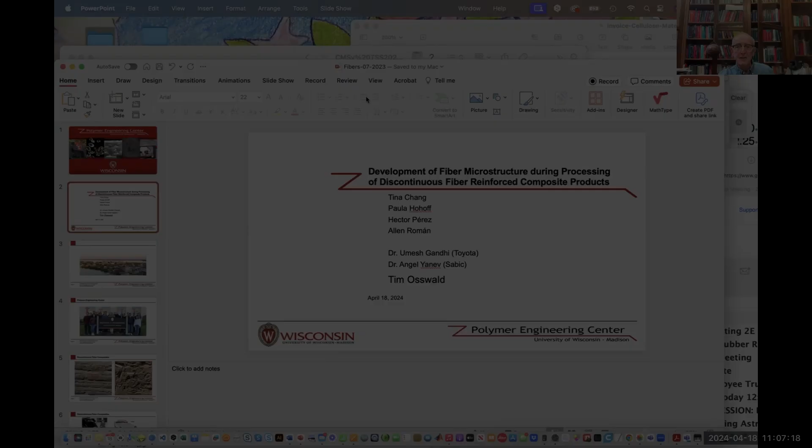Thank you very much. Thank you so much, Byron, for that kind introduction, and thank you so much for inviting me to be part of this prestigious series on composites. My presentation today will deal with development of fiber microstructure during processing of discontinuous fiber reinforced composite products.

There are a lot more people involved in this work that I've collaborated with over the past few years. I've named the 4 most recent graduate students who have worked on this, and I also named 2 of my collaborators in industry, Dr.

Umesh Gandhi and Dr. Angel Yanev from Toyota and SABIC, respectively, and of course there's a lot more people working in this field. But throughout the years, my former advisor, Chuck Tucker, laid the groundwork for a lot of the work that people have worked on now worldwide in this field, and you'll see probably some of his data and results throughout this presentation.

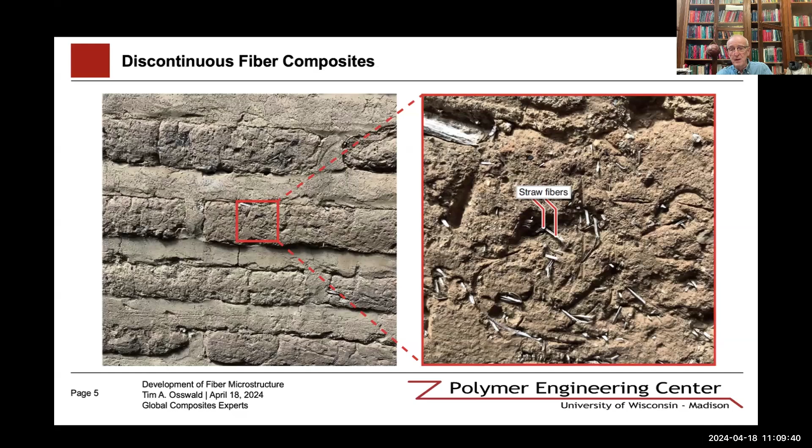Discontinuous fiber composites is not a new thing. This is a photograph I took years ago in Panajachel, Guatemala, where adobe bricks and old constructions are made with mud and straw, which are discontinuous fiber composites, and they are what really hold things together. So it's a field that has been around for many, many years.

You can see some old photographs here: the 1946 trunk lid of a Ford being hit by an axe by Henry Ford, made with unsaturated polyester and glass fiber. Then there was the glass fiber Corvette in 1953 that came out in June of that year. And today, even in 2024, the Corvette is still compression molded out of sheet molding compound discontinuous fiber composites.

During mold filling, many things occur in manufacturing of these products: fiber orientation distributions form, fiber length distributions form, fiber density distributions form, and I will talk about some of those today, some in more detail and some in lesser detail.

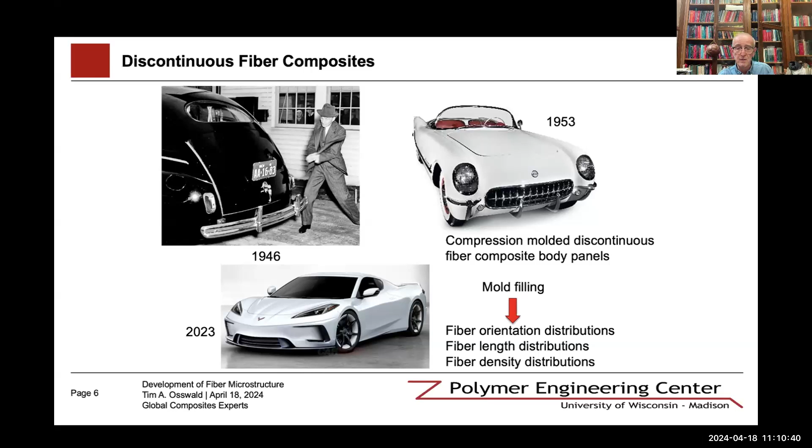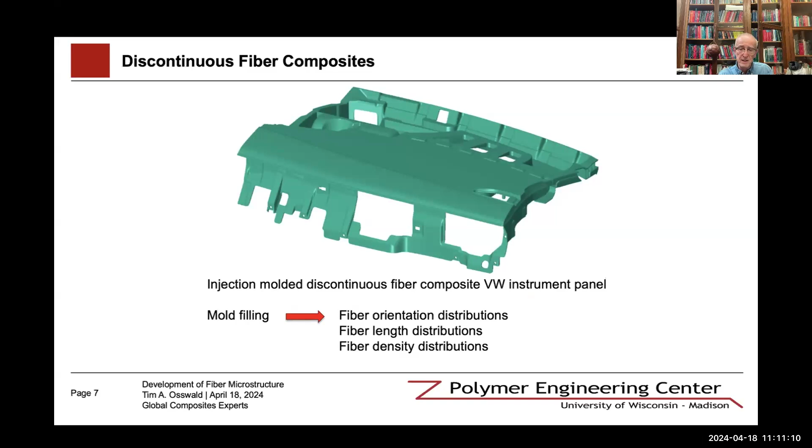In injection molding of discontinuous fiber composites, this would be a demonstrator part from VW, a VW instrument panel. Again, the mold filling is what determines the microstructure within the final part. But as we will see at the end, not just mold filling, but also the injection molding plasticating unit has a big role to play, and I will actually end up with that, which is an area of current research.

From a bird's eye view, I have these graphs. The upper part shows the fiber parameters alone. Fiber length has a huge impact on the properties - you can see the modulus, strength, and impact on the upper left side are all affected by fiber length. Fiber concentration is also important. The impact strength eventually reaches a maximum at a certain fiber concentration, then it becomes more brittle. However, the modulus continues to increase with fiber concentration.

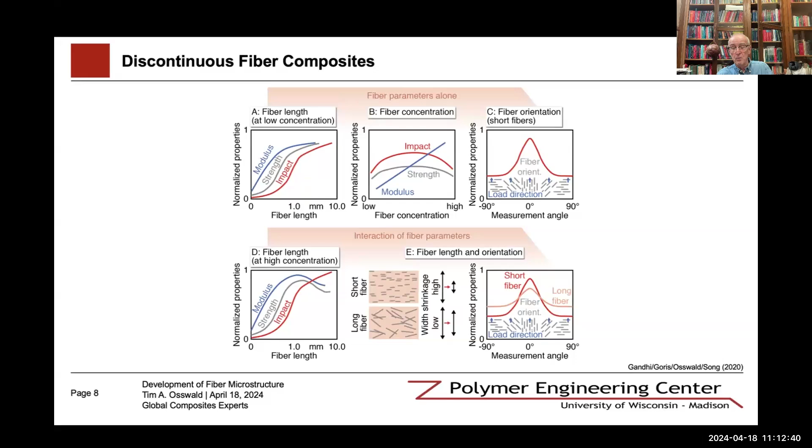Fiber orientation plays a significant role in the final properties of the part. There's interactions between all of these - between fiber density, fiber orientation, and fiber length. At high concentrations, fiber length will start going down, and the modulus eventually goes down. In the middle, you will have shorter fibers and longer fibers, and they will affect orientation. On the right-hand side, long fibers will reach lower degrees of orientation because of higher interactions between the fibers, while short fibers will be able to reach higher degrees of orientation.

This is just a little review for those not familiar with it - a way to represent fiber orientation distributions using the Tucker-Advani tensors. If we look at random orientation, a fiber is represented with a unit vector, as seen on the upper left hand side. If we take the unit vector P1, P2, P3 with the orientation angles, we can generate an orientation tensor where we integrate around the orientation distribution. We can also measure them and average out every fiber, giving us a general orientation tensor, AIJ, which I'll come back to with some results and measurements.

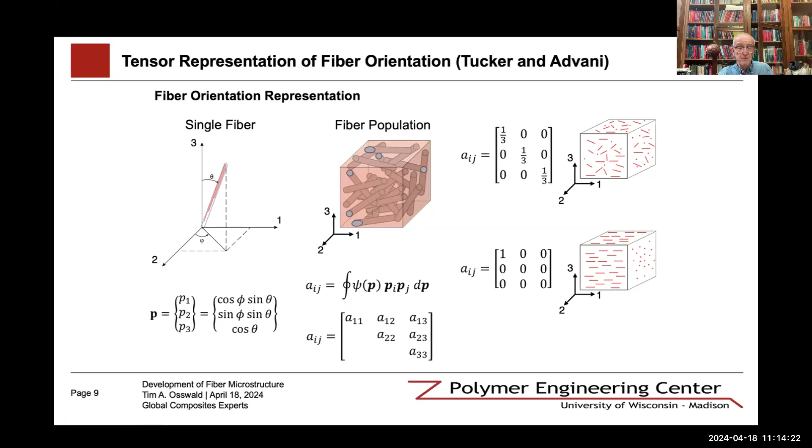If you see the AIJ on top, a random orientation would be represented by A11, A22, A33 as equal parameters that add up to 1. So that's one thing that makes it easy. 1/3, 1/3, 1/3 simply represents a random orientation distribution. If they're all oriented in one direction, as the lower right-hand side shows, then the orientation tensor would simply have a 1 in the A11 term, and the others are 0. So this is just a brief description of the orientation tensors I'll use in the next few slides.

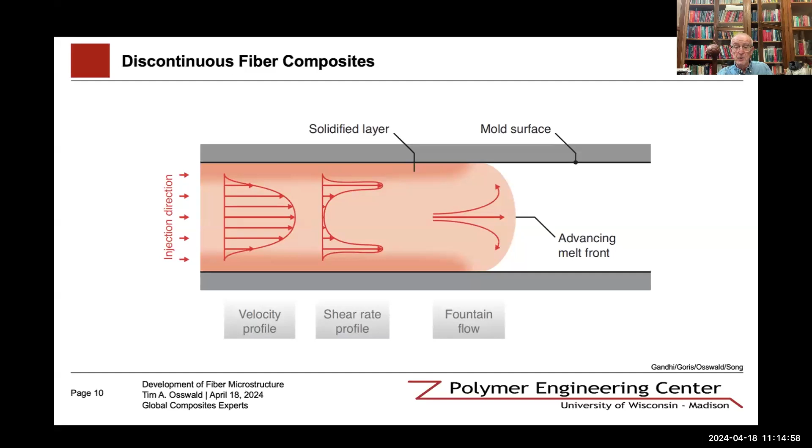There are different things that cause orientation. One of them is the advancing melt front, so you can see a fountain flow effect that leads to orientation, a stretching in that area in the direction of flow, which lays fibers on the upper and lower surface of a molded part in the direction of flow. So it creates a skin layer in the part where you have a preferential orientation in that direction.

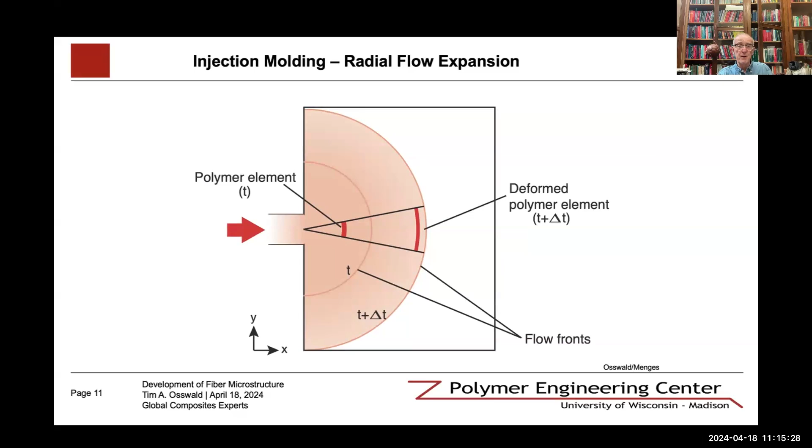There is also radial flow expansion in the central core of the part. So you usually have radial flow expansion, and there the fibers get oriented perpendicular to the direction of flow. So typically you'll have orientation perpendicular to the flow in the central core of an injection molded part, and orientation in the direction of flow in the outer skin.

So let's look at an example part. This is a demonstrator part from SABIC, simulated with Moldex 3D. We have the injection molded process, and we have different areas that we analyzed. You can see the middle figure on the left-hand side, positions 1, 2, and 3 - we will refer to those. The lower part is our pyrolysis examinations.

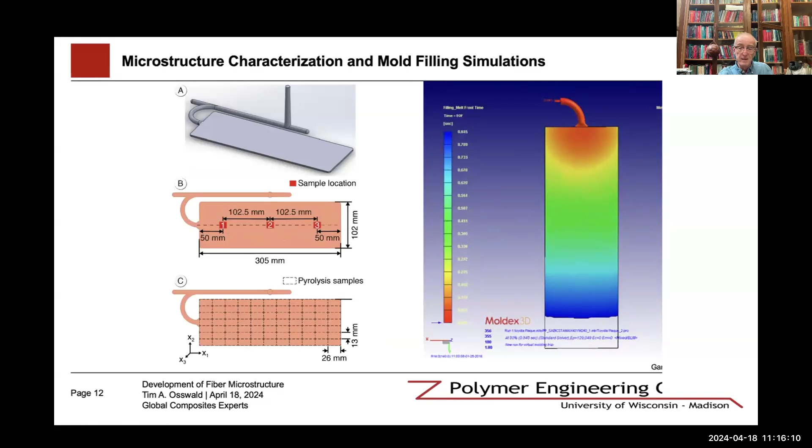We did pyrolysis examinations on the fibers to be able to predict or measure fiber content throughout the part. So if we look at, for example, location 1 in the central location of that plate, we have fiber orientation and fiber density data throughout the part.

This is using polypropylene with 30% glass fibers. The original fiber length of the pellets was 15 millimeters. This is Stamax from SABIC, and you can see an orientation in the direction of flow. The upper picture on the left shows the measured orientation. The lower picture shows the normalized fiber density. And on the right-hand side is a micro CT.

As we go through the thickness of the part, you can see how the orientation starts out in the direction of flow in the outer skin, and then becomes oriented perpendicular to the direction of flow in the central portion.

You can see that in the A11. A11 is the direction of flow. A22 is the direction perpendicular to the flow. So these are the orientation tensors across the thickness.

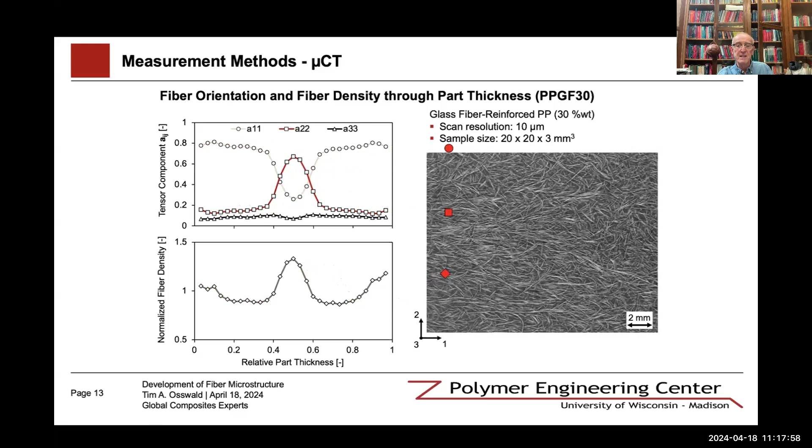So we can see if we travel along the thickness of the part, you can see how the fibers oriented in the direction perpendicular to the flow. You can see the orientation, how it changes, but also how the density of the fiber becomes higher in the center of the part.

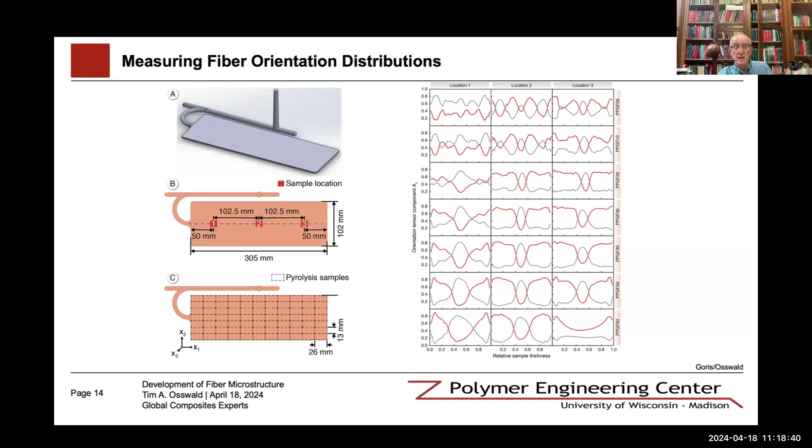So we can do different measurements. Here, positions 1, 2, and 3, locations 1, 2, and 3 in the central graph on the left - there are the measured values, and on the right-hand side with different fiber contents going from 5% fiber content to higher as we go down to higher concentrations. You can see the concentration of the fiber affects the final orientation of the part in the different locations. So these are all measured values.

So many things we did built on the basis laid down by previous researchers. We used what we call a mechanistic model, where we model individual fibers, also called direct fiber simulation. Here we have a simple shear flow where the fibers start out randomly oriented in space. If we move the upper plate and lower plate in opposite directions...

Using a boundary condition between the entrance and exit flow, you can see the fibers starting to orient in the direction of flow. Of course, there is no orientation in the second direction, so only directions 1 and 3 are changed. In the second direction, it remains at 0.33, 0.32. You can see a final orientation in the direction of flow, and fewer orientations across the thickness of the part at 0.03. That would be the lower tensor component.

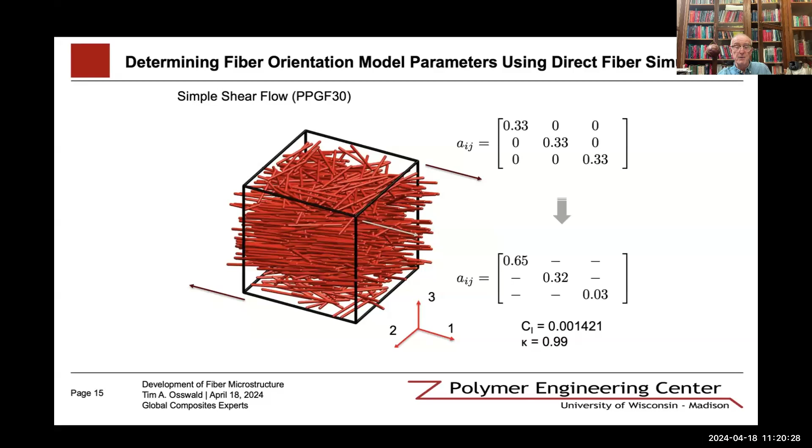For this, we then determined, by doing a fit in the model equation using the Tucker model, the Folgar-Tucker model, where we have the interaction of the fibers as well as the length of it. So we can see in the simulation parameters using Moldex 3D, by applying the mechanistic method to determine the fitting parameters, we can get fairly close representations.

Fiber orientation as simulated and as measured. There's still some discrepancies, but one of the things that the model assumes is a constant fiber density distribution. And as you saw, the fiber density distribution in the center increases, so we have more fibers in the center or core of the part than in the skin area.

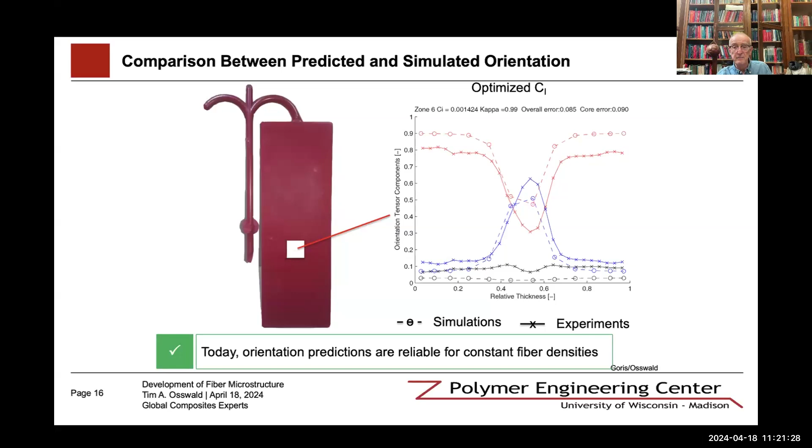And so obviously we will never be able to get a very accurate representation unless we include the variability or fiber density distribution during processing. We can also use this in compression molding. Compression molding is when we simply cut charges, place them in the mold, and then squeeze them. This would, of course, also lead to fiber orientations.

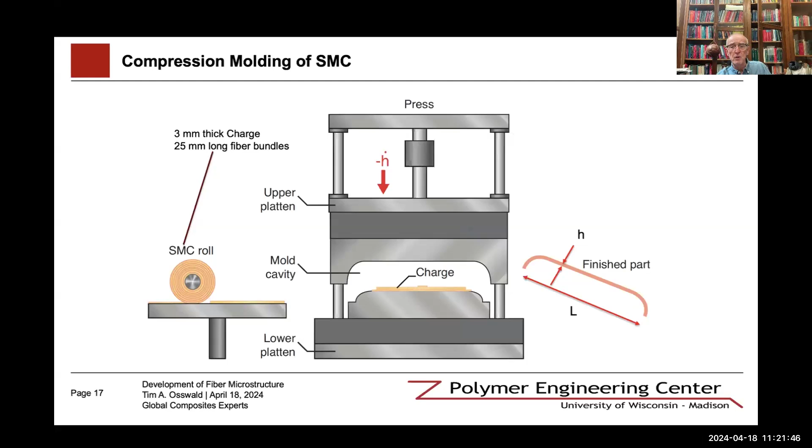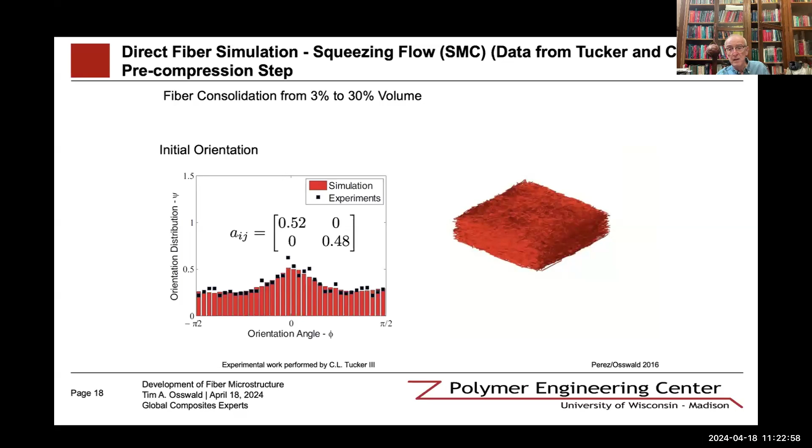And then simply compress them without generating any deformation, so the fibers interact during compression. That's the change you see between the original data and the simulation data, which are the red bars. The black dots are the original data, and the red bars are the orientation in this charge, represented on the right-hand side.

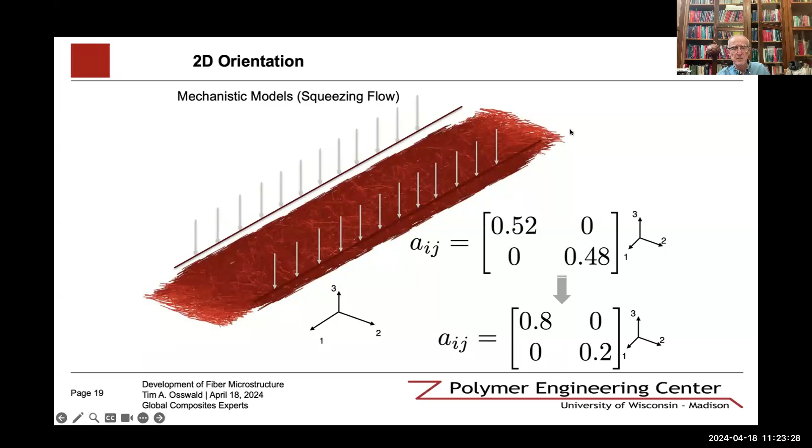And so if we squeeze that in one direction, as in the experiments that Chen and Tucker performed, you can see the change in orientation, represented here with the Advani-Tucker models. There are other things you can see that I'll refer to a little bit later. You can see a change in the fiber density distribution, particularly in the flow front.

So if we compare the Folgar-Tucker model to the experiments by Jackson and Tucker, my mistake, not Chen and Tucker, and the mechanistic model, you can see they all match quite well, which means the mechanistic model can represent the orientation really well. We can use the mechanistic model to determine interaction parameters and fitting parameters for the various models that exist.

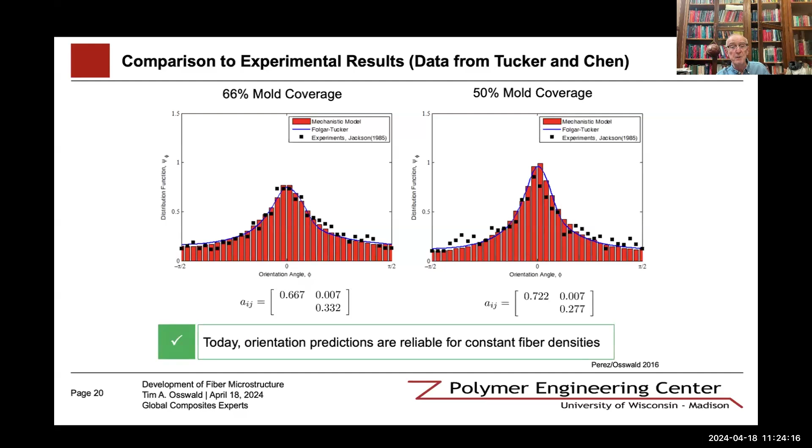So today, orientation predictions are reliable for constant fiber densities, and we know that fiber densities, of course, vary. The reason why is from the Tucker and Chen data, where we can see the need for having orientation in the final properties.

If we just concentrate on the lowest curve and the highest curve, that's in the direction perpendicular to the fibers and parallel to the fiber orientation, for the 33% mold coverage. So when we have a charge that's three times as thick as the final part, there's quite a bit of deformation, which is not atypical for compression molded parts.

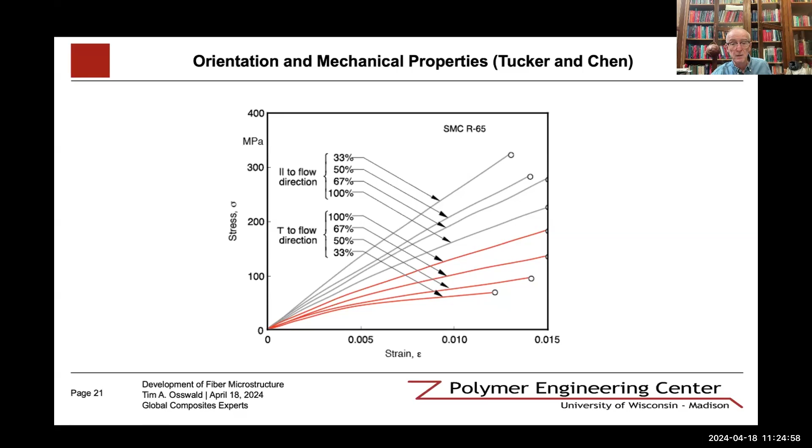If we look at the compression from the top, we can see fiber-matrix separation taking place. The little black box represents the actual volume of the material, and the fibers, you can see them lagging behind. This is very typical for compression molded parts.

So if you look at trunk lids and hoods of compression molded parts, the part that first starts failing is the crumbling at the edges. The edges crumble because they're very poor in fiber content. This fiber-matrix separation is something we need to deal with and needs to be predicted, and it's something not quite well understood yet. There are different models by Morris, Boulay, and others that represent fiber-matrix separation and fiber migration, but they are not quite where they should be.

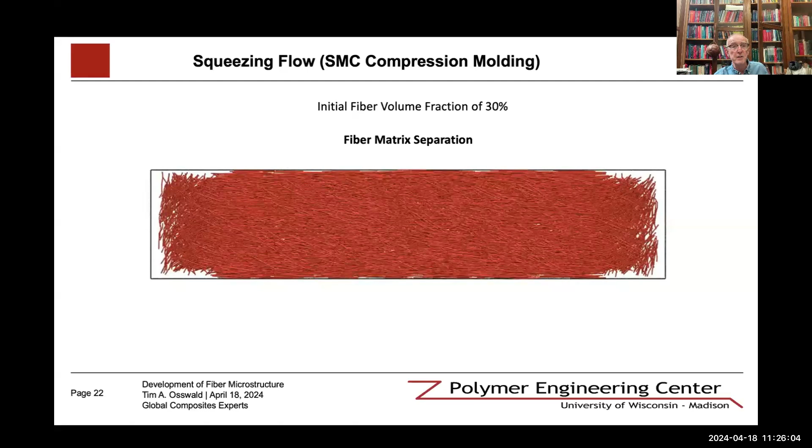Software today does predict fiber matrix separation, but in many cases they don't lead to the actual distributions seen in parts. The first thing I'll show regarding fiber matrix separation is, again, the three samples 1, 2, and 3, for two different fiber contents: 20% glass fiber and 40% glass fiber.

These are glass fiber, injection molded parts using the Stamax materials, where the original fiber length is 15 millimeters. You can see there are two different techniques used to measure the fiber density distribution. The red lines are micro CT, assessing the fiber density distribution using that method.

The second one, the little gray circles, is a more cumbersome way of doing it, but more exact: milling the part, measuring the content, burning the powder that is milled off, and measuring the glass content after a pyrolysis analysis, so it's more accurate. But you can see both techniques, the micro CT and the milling method, actually give the same results.

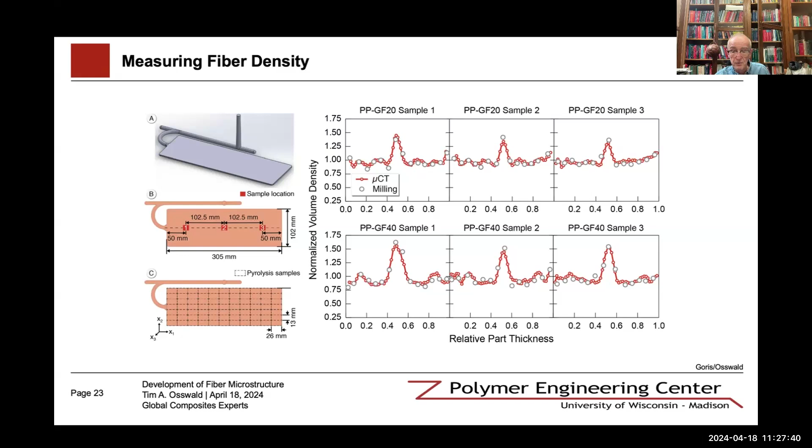So micro CT is definitely a technique that can be used to measure that fiber density distribution, and we've used that in many of our studies, so we don't have to use the cumbersome milling technique.

Another aspect of fiber density distribution is taking samples, not looking at the thickness distribution, but rather taking small samples as shown on the lower left side and doing pyrolysis on that, measuring fiber density distribution. You can see from left to right we go from 5% to 60% glass fiber content.

There are 6 plates, and each plate has 2 halves, a symmetric case, so we actually have the averaging of 12 different samples, and you can see how the fiber density distribution changes with fiber content between 5 and 60%.

There is a significant change in fiber density. You can see the typical filling, fiber content of 20, 30, 40% that is used commercially, that there is a huge fiber density at the end of the part. That's very typical: if you mold a part, the last place to fill usually has the highest fiber density.

This is something people are not able to predict very well yet using models like the Morris and Boulay model, which is the one implemented in Moldex 3D at least. That effect is quite significant, and I think further work needs to be done there. There is certainly room for research and for people to fine tune the models.

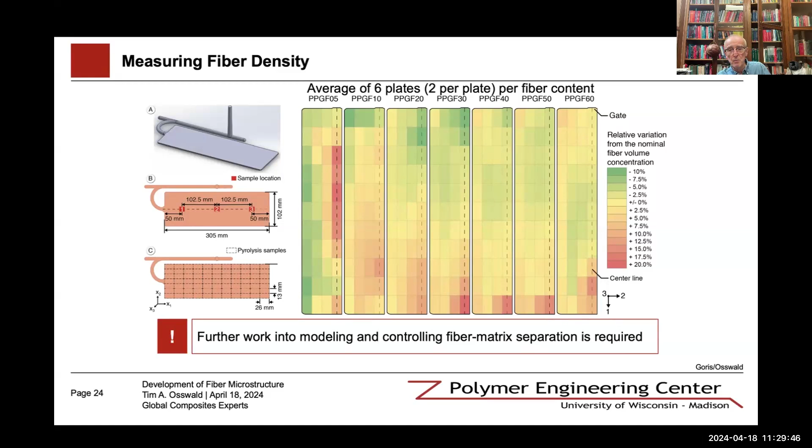Maybe use some of them, but for example, the effect in compression molding cannot be predicted with the Morris and Boulay model. So the last thing I wanted to chat about is fiber length and fiber attrition. Fiber length is really important. We have these long fiber reinforced thermoplastics; we start out with pellets that are 10 millimeters long, 15 millimeters long.

To be able to have at the end a fiber length much higher, where we can use the fiber to the best of its abilities by maintaining its length. However, unfortunately, we can't. This graph actually shows the effect of fiber length. Typically, we know that a fiber length or L over D ratio of 100 is the length we should have to retain properties, but in many cases we don't even come close to that.

So the fibers get damaged significantly, and we can go down to, not sub-micrometer, but 300 or so micrometers in length, which are L over Ds of maybe 15 or 30. So fiber attrition is significant.

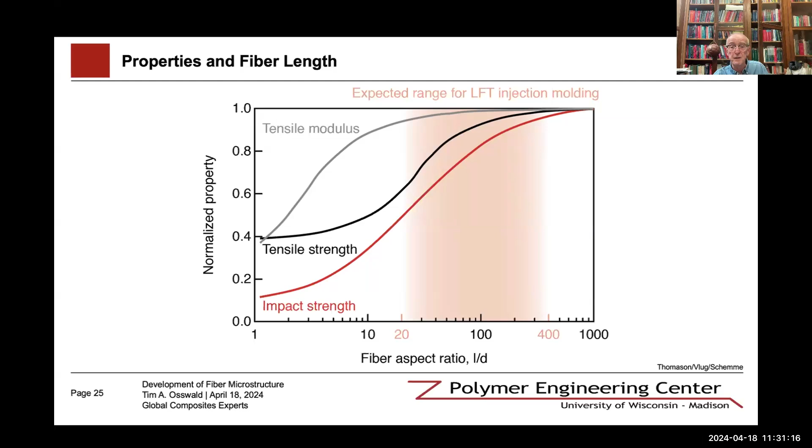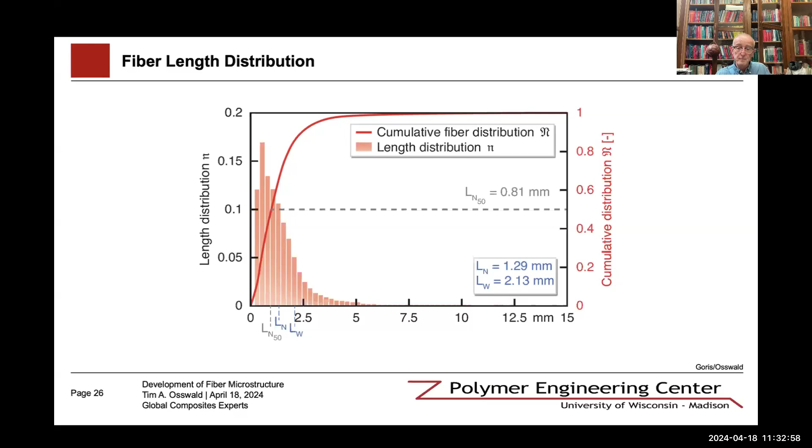And there's the N50 length. That means 50% of the fibers, in this case, are longer than 0.81 millimeters. That's, of course, where the cumulative fiber length distribution is at 0.5. So that's a way to represent distributions.

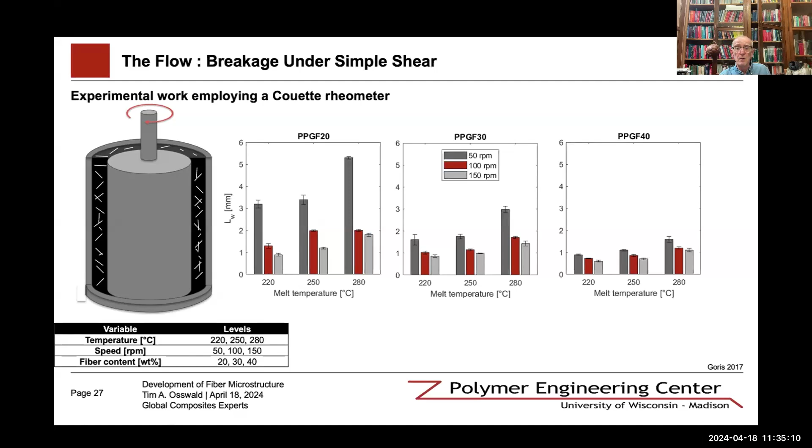As we move to the graphs on the right-hand side, with higher fiber content, you get more fiber interaction, which we also see in the orientation models. The higher the fiber interaction, the lower the length distribution. All these things play a role, so the question is what leads to this damage. There are models, of course, like the one by Phelps and Tucker that uses a buckling model effect.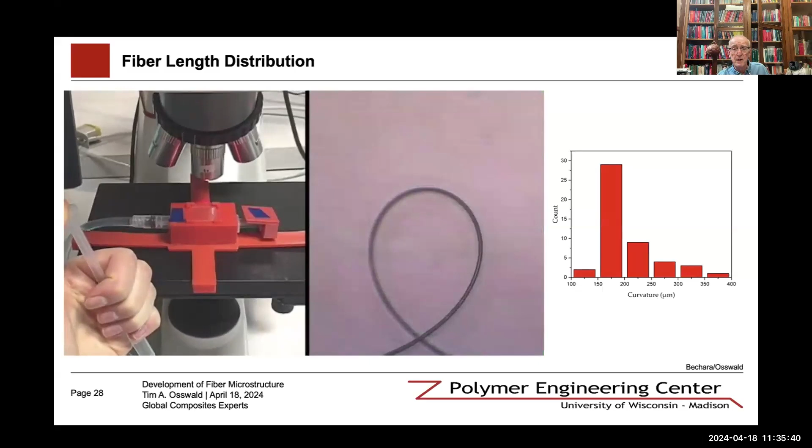So let's look at what causes fibers to break. There are some experiments that my graduate student Avran Bechara did, where he made a loop of a fiber, 19 micrometers in diameter. By pulling the fiber, we can measure it, and then you can see the fiber break at the end.

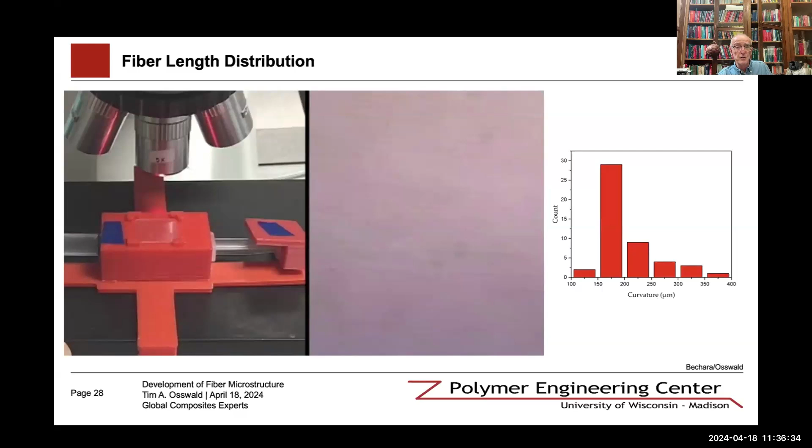He recorded the point where the fiber broke, and recorded the radius of curvature, but noticed that the radius of curvature varied from fiber to fiber. There was a distribution of the radius of curvature, and the reason for that is some fibers are damaged—they have a little scratch on the side—which leads to variability. A perfect, smooth fiber can have a radius of curvature of 125 micrometers where it fails, but depending on scratches, you could get larger and larger radii of curvature in the system. So we included that in the results.

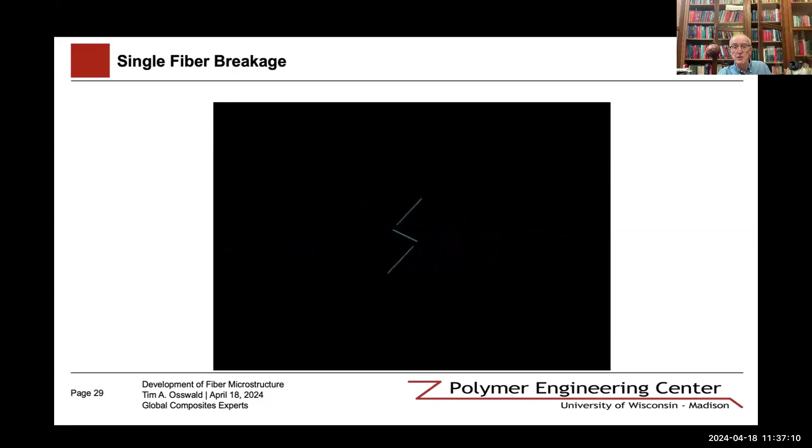So here, for example, is a fiber in shear—we can introduce that radius of curvature into the model. When we reach that radius of curvature, we break the fiber again. Here we don't see the buckling effect, but rather the ends of the fibers get broken off. Again, the fiber continues on its Jeffery orbit, deforms, turns very slowly, and then as it moves out of the horizontal position again, you can see failure. This is, of course, simulated.

We simulated several fibers—this is work that Tina Chang did during her PhD thesis. She used a mechanistic model to predict the fiber attrition as the fibers were sheared.

So we compared that to the Couette experiment. You can kind of see over time how the system broke the fibers down.

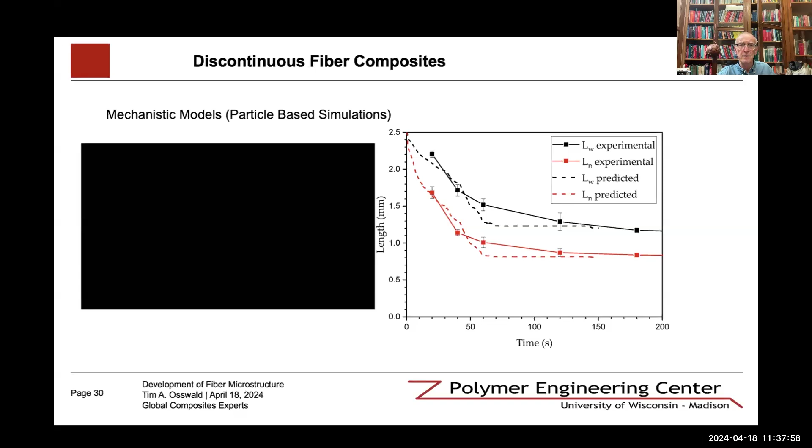Basically, we start out with a higher fiber length, and eventually we reach an equilibrium fiber length, or an unbreakable length. Based on that, we build a first order decay function where we have the L infinity.

You can see the upper equation: the rate of the breakage is proportional to the length itself. Obviously, the longer the fiber, the higher the breaking rate, and eventually when the length reaches the infinite or unbreakable length, you've reached an equilibrium where you no longer can break the fibers, because the shear stresses occurring during flow are no longer high enough to break it.

So basically you would have a function that predicts the length if you have a constant shear stress, where you would have a length distribution as below. The question is, what is Kf, the breaking rate, and what is L infinity?

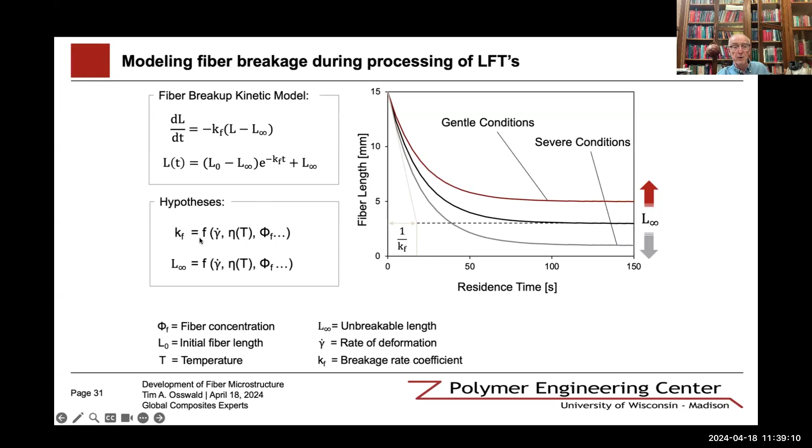So we did some conceptual thoughts here. The infinite length is basically, if we just look at a Stokes flow past the fiber at a certain velocity, the question is at which point do we reach the maximum stress at the edge of this beam, where the beam is bent enough to be able to break. That would be the corresponding infinite length for those conditions, given a fiber viscosity, matrix viscosity, and a fiber with a different fiber property.

You can see the equation for L infinity is the ultimate strength of the fiber, the diameter of the fiber, the viscosity of the matrix, and the rate of deformation, which leads to some standard not including fiber interaction.

Then of course lambda as a function of phi is a fitting parameter that takes into account the fiber content. You can see that parameter goes down as the fiber content goes up — that's the average value of lambda for various experiments. And K sub f has a similar effect.

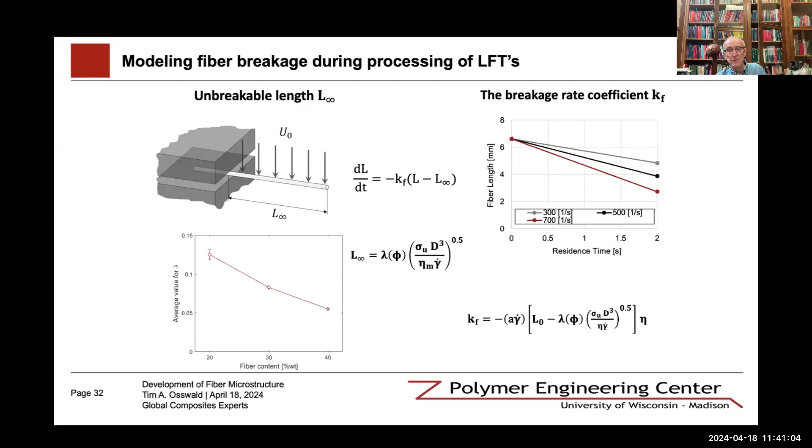So we have the breakage rate for different rates of deformation, and we can then attribute that to the infinite length and to the length of the original fibers, the initial fiber length.

So if we compare the model with a simple shear flow using our Couette device, and experimentally measure the length distribution during the process, we can see how the model and the experiments actually match quite well.

For the two different RPMs here, 50 RPM and 150 RPM.

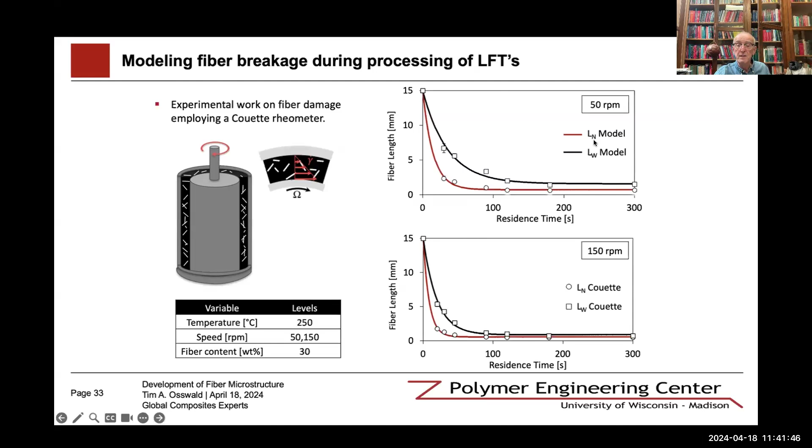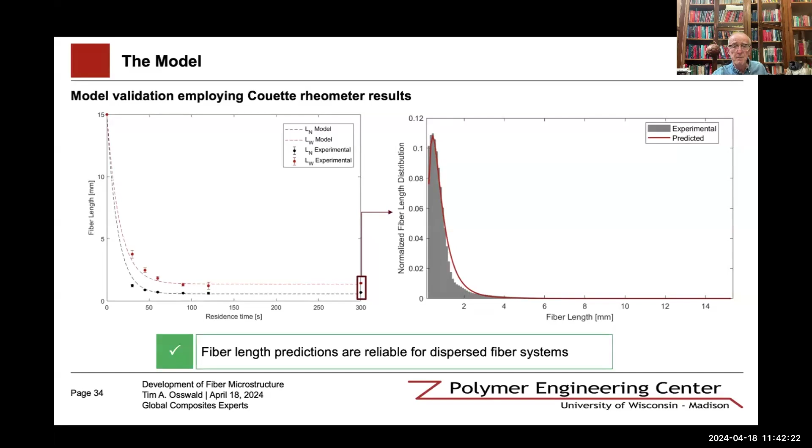So the fiber length model, or fiber attrition model, was then implemented into Moldex 3D, and tested with a simple plate. You can see the plate right here, with three locations: 1, 2, and 3.

For that, of course, we need the length distribution after the plasticating unit. So we start out by doing a purge of the injection molding machine, and in that purge we measure the length distribution, and use that as an input to Moldex 3D.

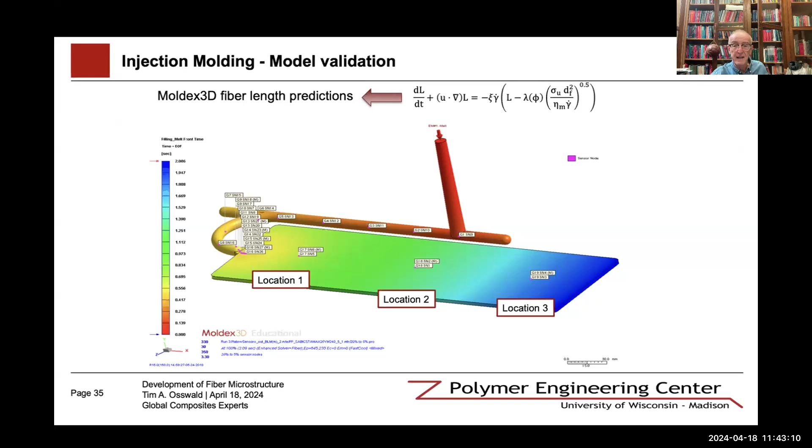What we need to remember is we start out with fibers that are 15 millimeters long, and we still don't have a model that can actually predict what occurs during the plasticating unit. You'll see later that it's a more complicated issue.

But if we have the purged length distribution, we can very well predict the fiber length distribution at the three locations, the number average and the length average throughout the plate. For different parameters in the model from Tina's work, we can actually fairly accurately predict that.

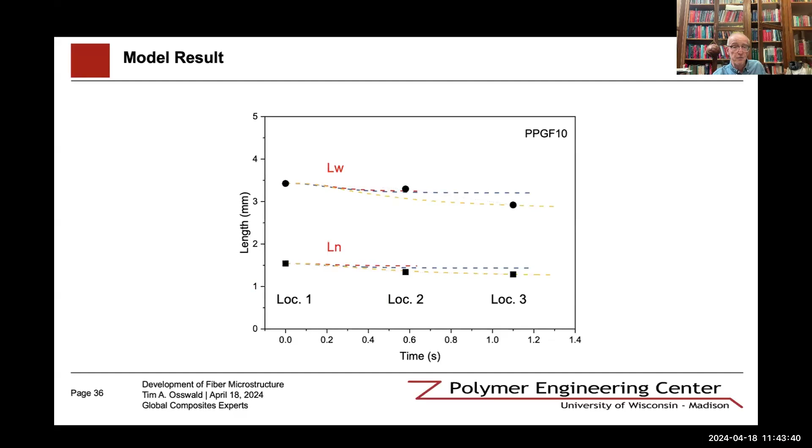That was then implemented together with our friends at SABIC and the people at Moldex 3D for this trunk lid, a demonstrated trunk lid that SABIC has. It's a more complex case.

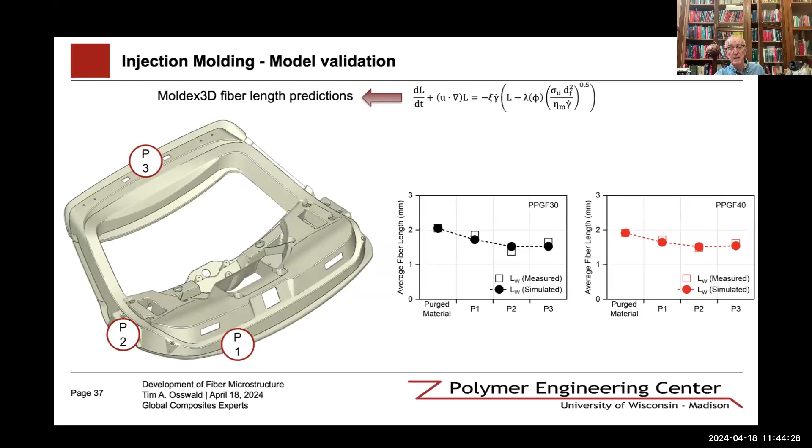There are several gates where you control when each gate opens during the process, but in positions 1, 2, and 3 we can actually predict quite well the fiber length distribution. Again, here we have as input the fiber length distribution of the purged material from the plasticating unit, but once we have that, we can predict quite well what happens during the process.

And so that brings me to the final part. There is an effect that hasn't been included, and that is the dispersion of the fibers.

If we look at the flow in the fiber breakage experiment during the Couette flow experiments, and do micro CTs at different times, at time equals 0 you can see the fiber bundles completely together. After 5 seconds, there are still several bundles that haven't been dispersed. At 12 seconds, you can still see some undispersed fibers, and then again as you move along. So fiber dispersion is really important.

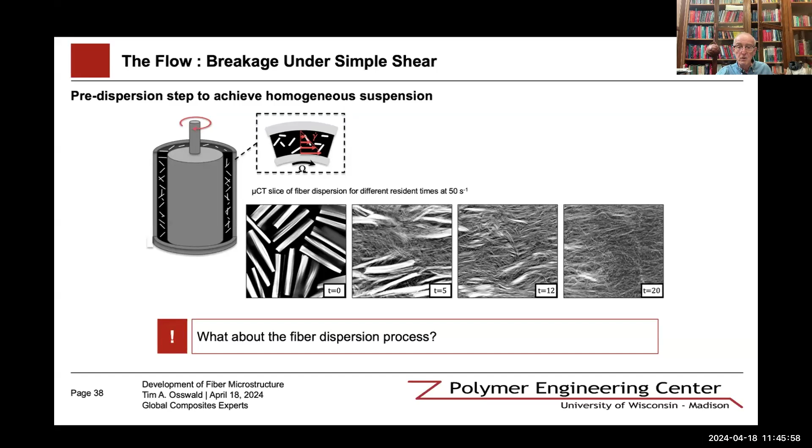The melting and dispersion is something that occurs in the plasticating unit that has not been looked at in much detail. So the question is, how do fibers disperse? We did a bunch of experiments using a sliding plate rheometer, where we have a simple shear flow and where the fibers get dispersed.

And so we analyze the dispersion of the fibers, and we have a parameter S, which is the perimeter squared divided by the area. These are the coated compared to pultruded fibers, two types of long fiber reinforced thermoplastics.

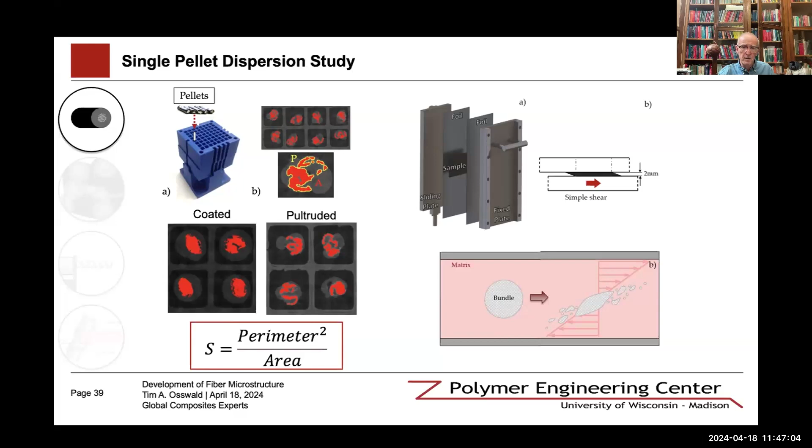Coated are the ones that come where the fiber itself is just coated with polymer and extruded. The pultruded ones are... actually, the other way around. The coated ones are where we have a wax coating on the fiber, and the pultruded ones are where the fibers already come a little bit more predispersed.

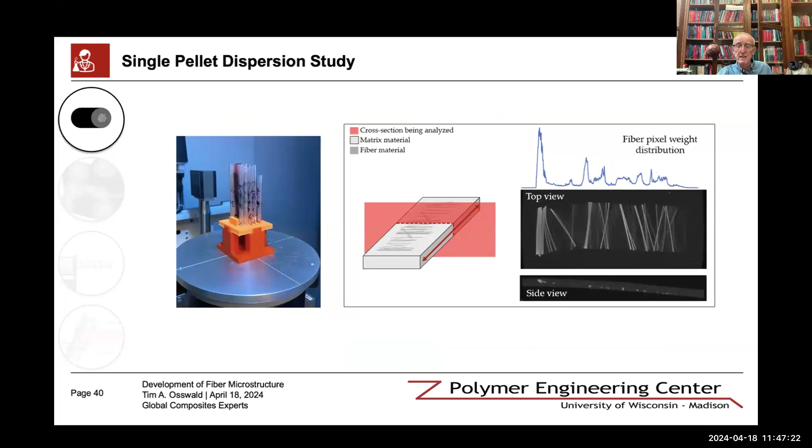So we did a lot of micro CT analysis on the dispersion of the fibers using sliding plate rheometry, and doing the analysis using micro CT was found to be a great way to assess the dispersion of the fibers.

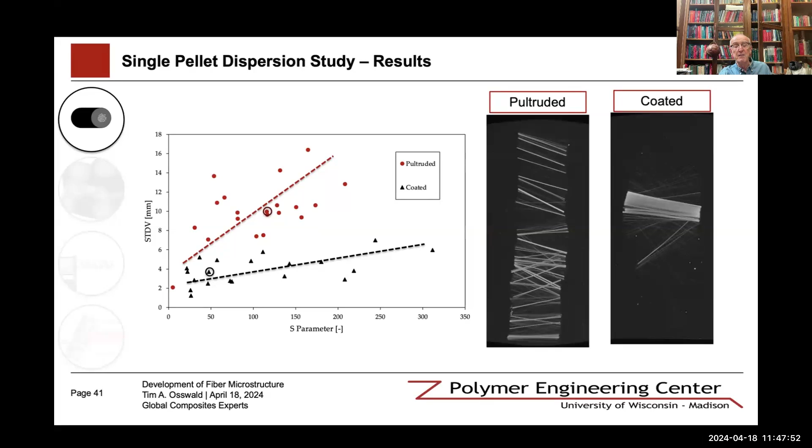So we can see the pultruded versus the coated ones, the standard deviation of the difference in the color of the pixels determines how the fiber, whether coated or pultruded, behaves differently from one another, to be able to include that in our models.

So the next thing my graduate student Hector Perez did was finding a coefficient of variance in the different X-ray or micro CT X-ray devices.

So we match that reference sample as 0% dispersion all the way to the completely dispersed value, and from that we can determine the dispersion of the fibers using the coefficient of variance. So using the actual X-ray images, we can then assess dispersion in different samples.

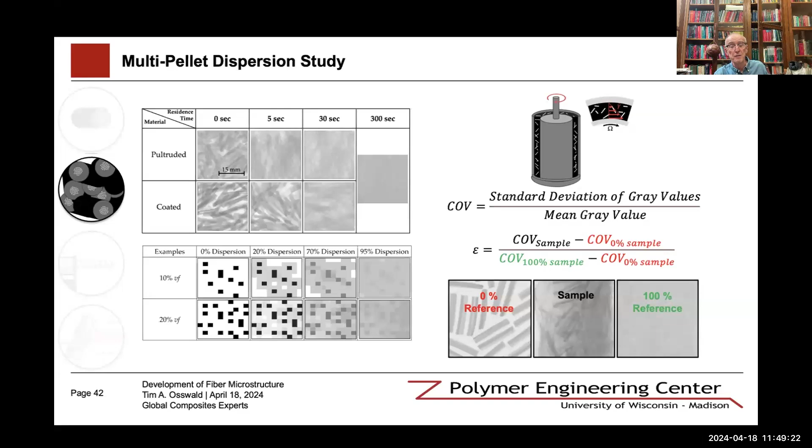So here you can see, for example, individual values. The dispersion, the pultrusion versus the coated on the right-hand side, using the same reference value.

For example, the pultruded ones already have a certain dispersion within them. So when you compare them 1 to 1 together, they already have a certain dispersion as compared to the coated values.

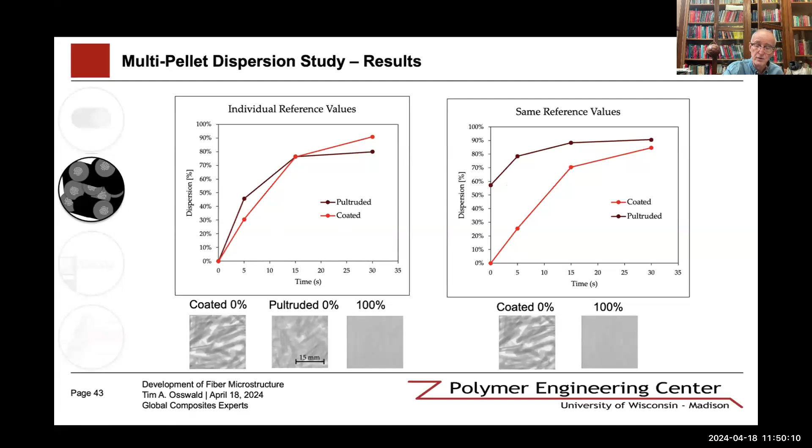So what we do is normalize it and use individual reference values for pultruded and coated as 0% dispersion. That's the left-hand picture, normalized to their initial dispersion value. So those are the measured values.

Then what we did is we borrowed a model from Professor Manas-Zloczower, which was for dispersion of carbon black using the cohesive stresses and the stresses during dispersion. And we found that the Manas-Zloczower model actually worked quite well.

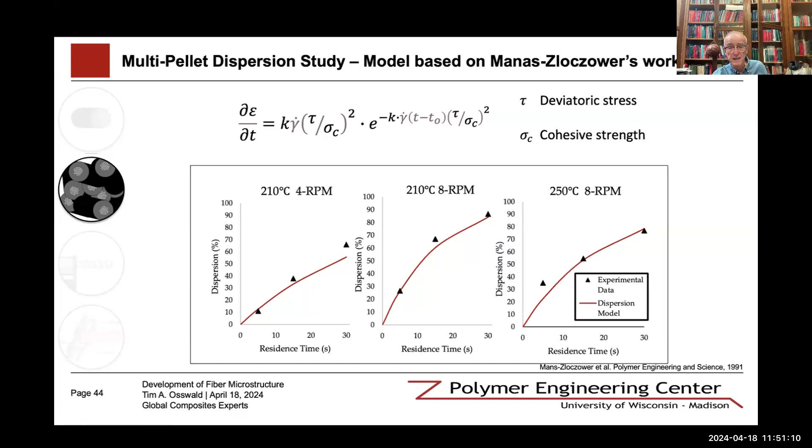The model worked well in predicting the dispersion at different conditions: 210 degrees at 4 and 8 RPM, and then 250 degrees at 8 RPM. So varying the temperature, which varies the viscosity, and varying the RPM. You can notice again here we're still using relatively low RPMs in our Couette device, but you can see the model compares well to the experimental data.

The next thing we did was pull-out studies in extruders to understand what occurs in the plasticating unit and see how dispersion advances throughout the system. You can see at L over D 16, you still have a relatively undispersed system, and at L over D of 30, you are almost completely dispersed, which is what you want.

When you injection mold these parts, the last thing you want is to still have an undispersed bundle, and that does happen. So we want to understand the dispersion and the completion of dispersion in the plasticating unit itself.

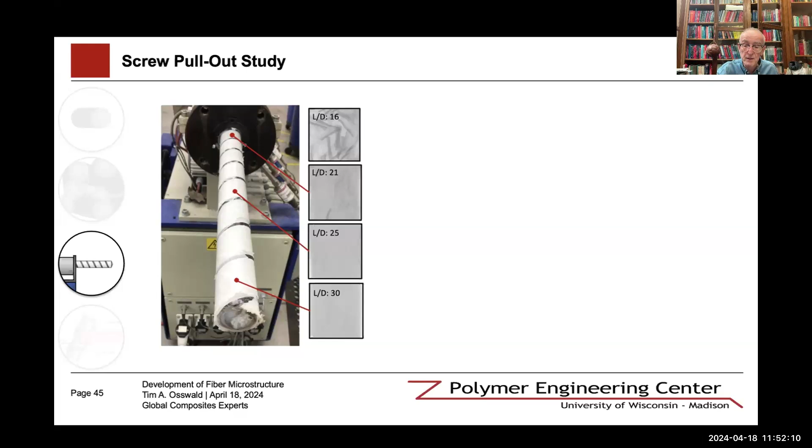So whatever then comes out in the purge, we used these conditions and different changes in the pull-out experiments. We took out samples, flattened them out, and did micro CT analysis to get images, using the images to find coefficient of variance and the dispersion along the L over D of the plasticating unit.

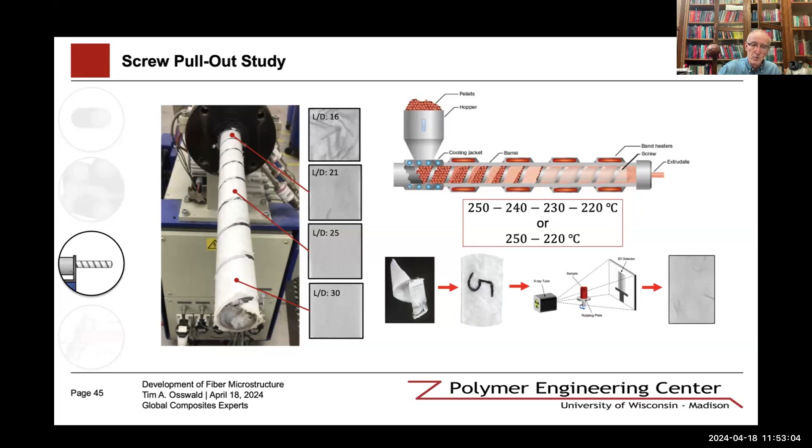This is not really truly a plasticating unit, it's the extruder, a 45 millimeter extruder we have in our lab. But basically the plasticating unit is an extruder with a reciprocating screw, so by understanding what occurs in the extruder, we understand what occurs in the actual system. Here we have the measured values at different parameters.

So dispersion using different parameters along the extruder, along the different L over Ds. You can see we reach almost 100% dispersion at the end. The different RPMs, 30 RPM, 15 RPM, you can see how dispersion is affected by that.

Glass fiber 30% and 40% with the coated pellets, so the fiber density, comparing pultruded pellets versus coated pellets in this dispersion.

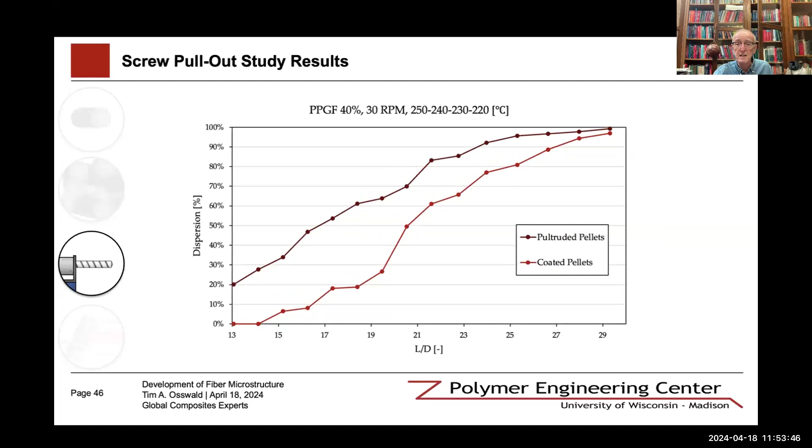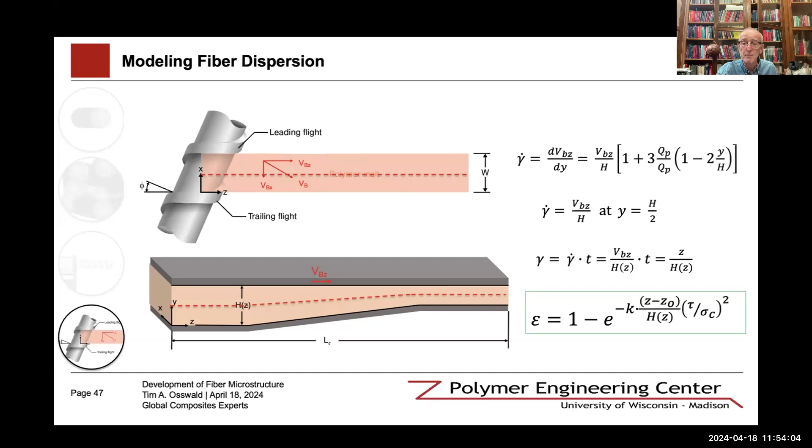And we then joined that to a model, and this is just a very brief analysis. We used the melting model by Tadmor and Klein, and we applied the Manas-Zloczower dispersion model, and we were able then to compare the model to the experiments.

One of the things we found is that dispersion doesn't start until about a melting of about 25%, where the solid bed is about 25% of the width of the channel, and that's where we know dispersion begins. We can see that there for the different parameters.

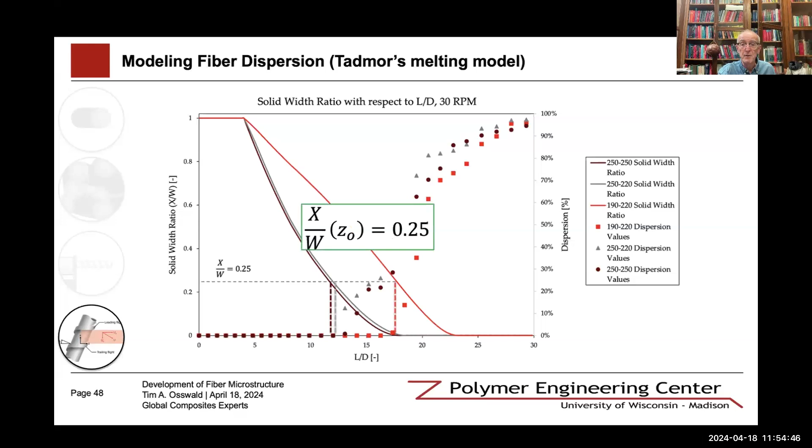We used the melting model and the parameters in the extruder to compare the dispersion, and we can compare dispersion quite well in the plasticating unit or extruder itself for different parameters. You can see several data points here, so it works quite well.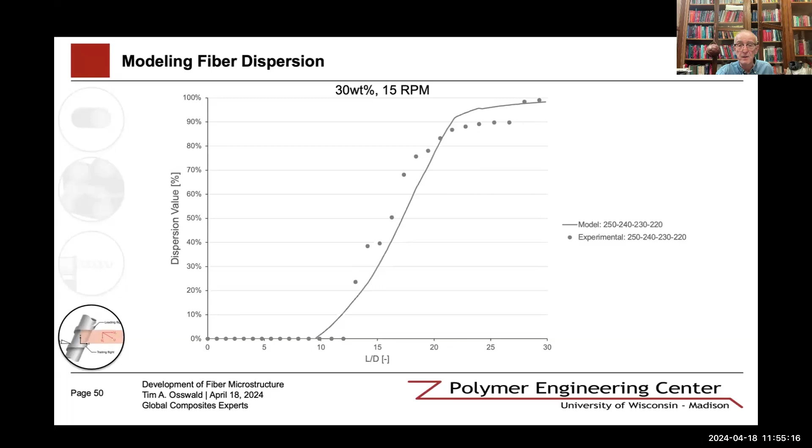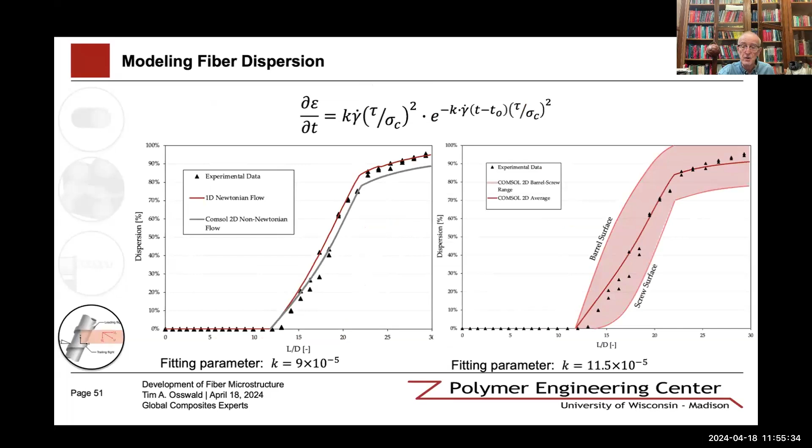This is currently being written up for a paper in Polymer Composites. You can see the comparison of the experimental data and the 1D Newtonian flow, and also the COMSOL data using non-Newtonian data, and you can see the prediction of dispersion works quite well. We compared models at higher RPM.

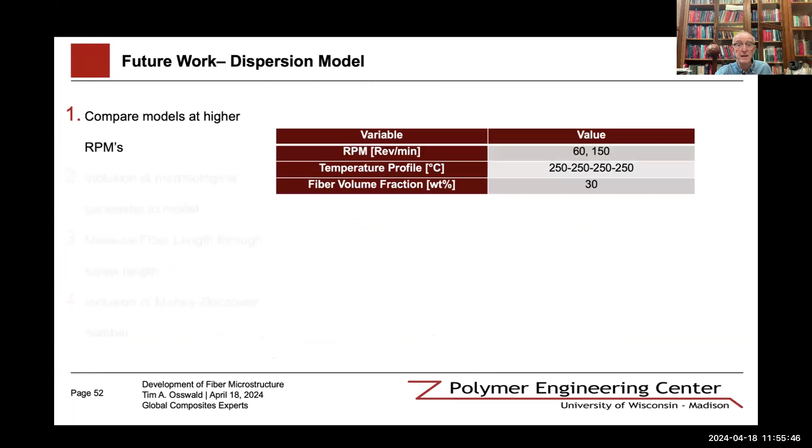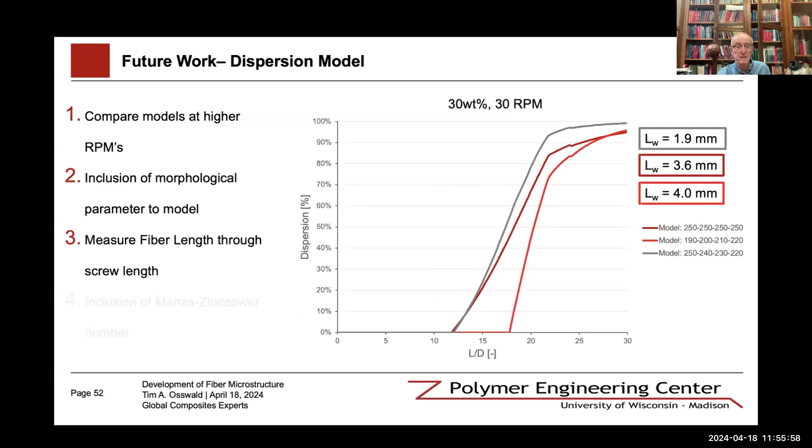Including the morphological parameter to the model, we did the measurements, measured fiber length through the screw length, and we included the Manas-Zloczower number.

One of the things I want to end with for future work: here you see the dispersion in the solid lines and the fiber length in the dashed lines throughout the plasticating unit. This would probably be the beginning of where we know dispersion is completely coupled to the fiber damage model, because undispersed fibers, when they're still close together, protect each other. So low dispersion means low fiber damage, high dispersion means higher fiber damage.

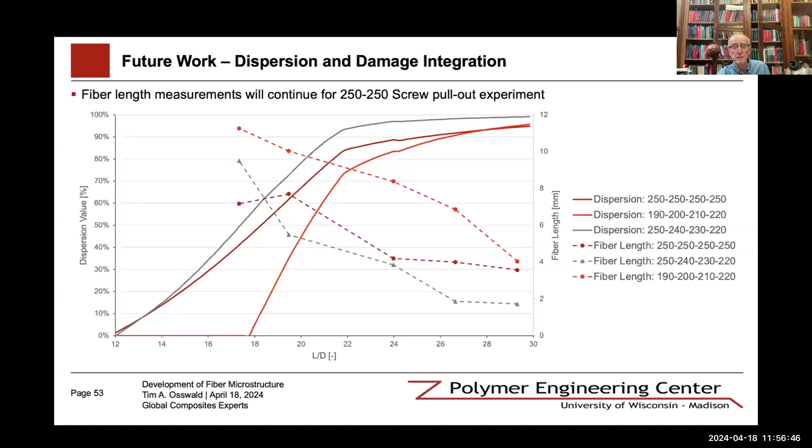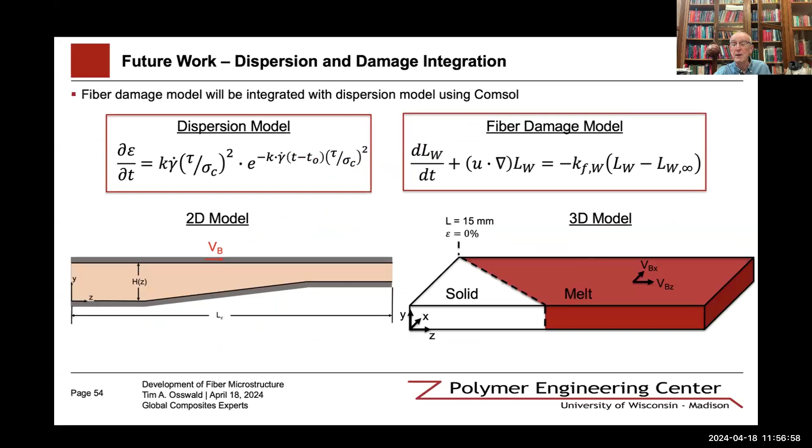So we have a coupled system that needs to be solved, and that's what my graduate student, Paula Hohoff, is doing right now, trying to solve the coupled dispersion and fiber attrition model for predicting fiber attrition in the actual plasticating unit of the injection molding machine.

So that brings me, sorry I sped up at the end, I saw I was running out of time. But you can see where research is going and where it has come from. And of course this is work that has been going on for the past 40 years by many research groups and people involved, in particular Chuck Tucker and his group at Illinois, my former advisor.